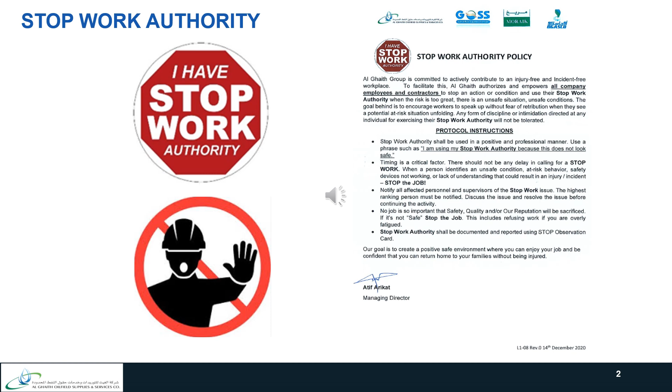Use a phrase such as "I am using my stop work authority because this does not look safe." Stop work authority shall be documented and reported using Al Ghaith and client stop observation card. Here are some scenarios where stop work authority and intervention was exercised at workshop, vehicle and at rig site.

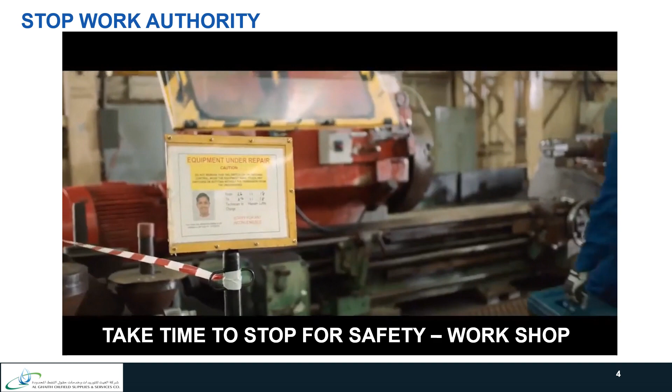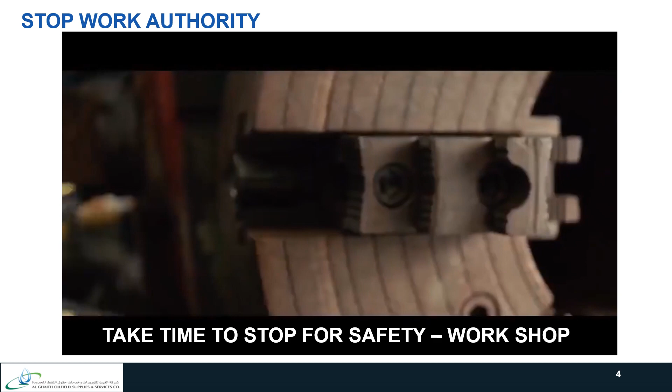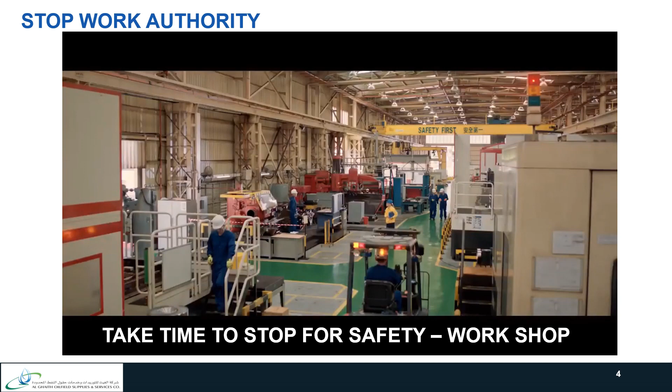Zam! Fadil. You should use the trolley instead. Come, let me help you. Don't forget to lock out, tag out.

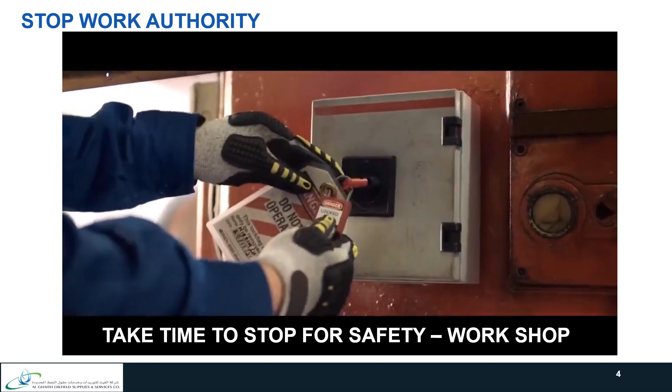Take time to take care of your safety and health at work and get home safely to your loved ones.

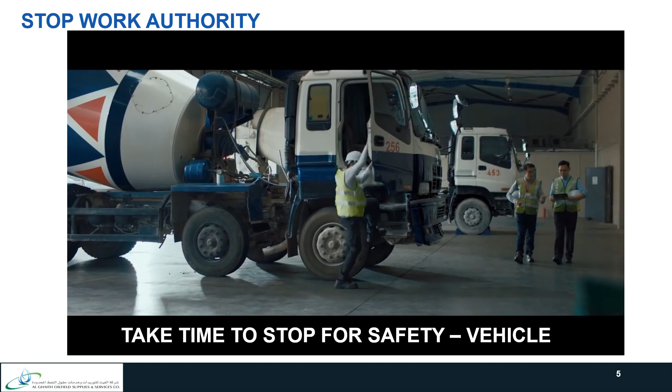Hey bro. Victor! Harness! Let's take a break. You forgot to put on the wheel chock.

Take time to take care of your safety and health at work and get home safely to your loved ones.

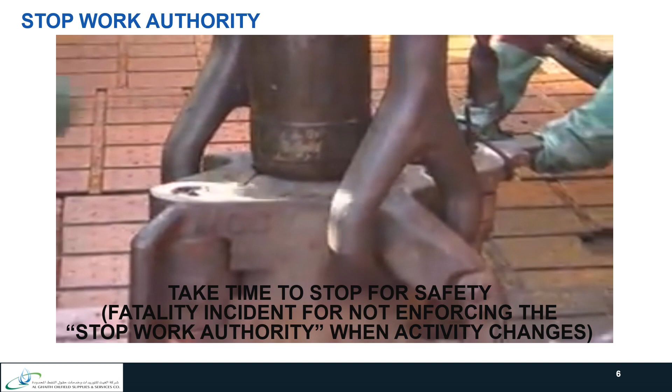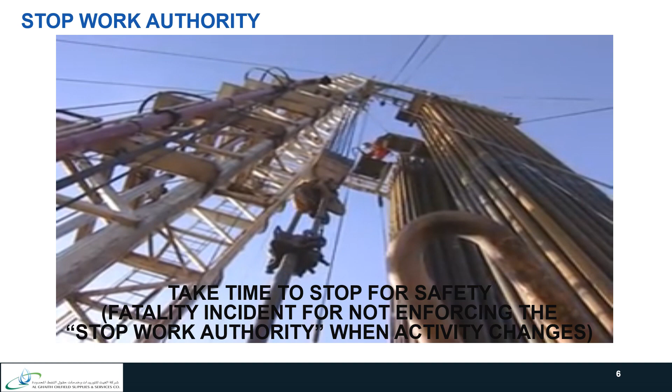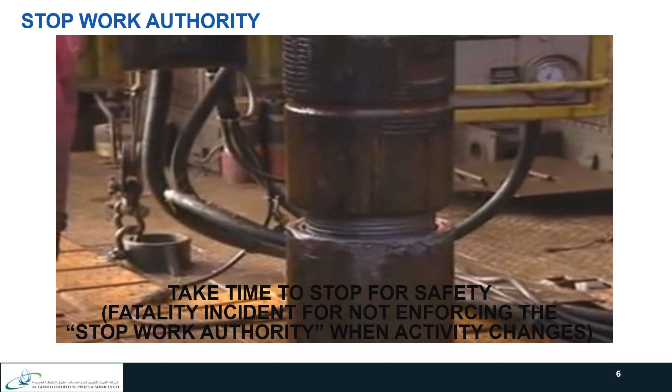But one small change in their equipment was about to have a catastrophic effect. The pipe string they were running was a cement stand, which with a cement stub added was 2 meters longer than their usual pipes. This meant they had to change the way they worked. The normal procedure was for the driller to lift the pipe stand out, and when it was disconnected, the two racking operators moved the pipe stand away from the rotary table, keeping it vertical.

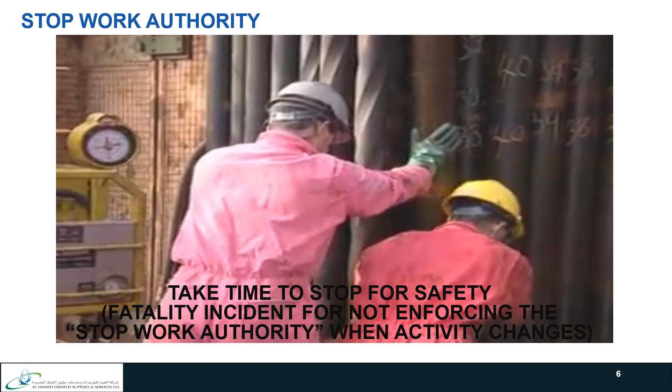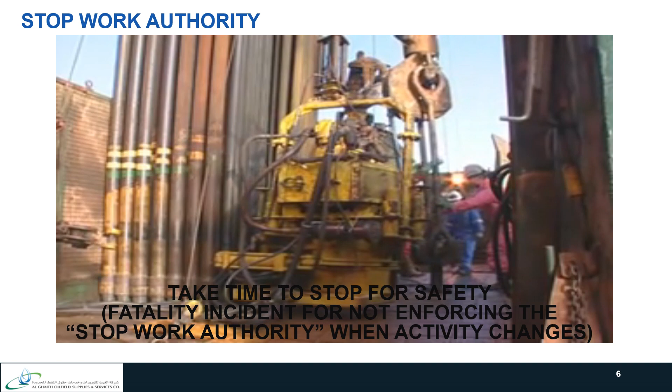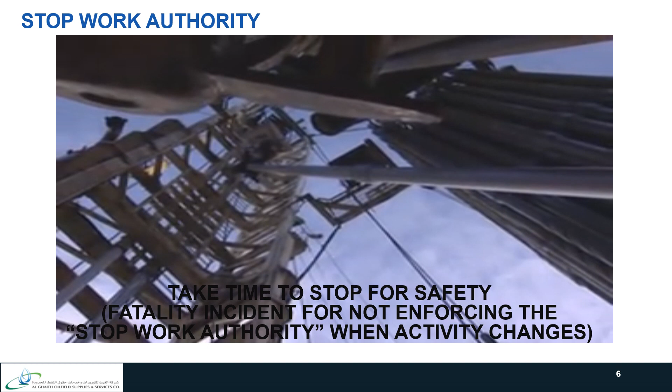Then the driller lowered the travelling block, which weighs about 60 tons, ready to connect up to the next pipe stand. But the longer pipe stand with the cement stub created a difficulty for the racking operators. It had to be inclined to put it in the rack. This took longer than normal, and for a short time the top of the inclined stand moved back into the path of the travelling block.

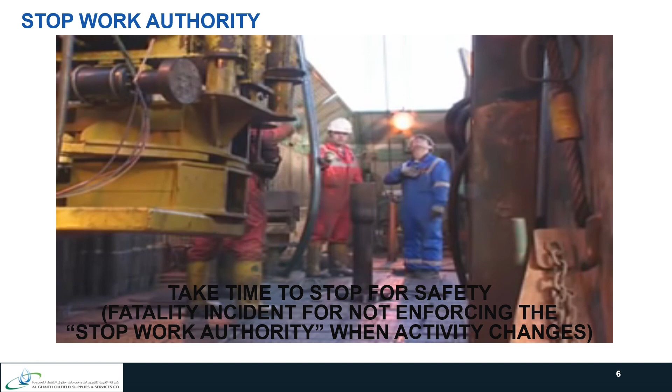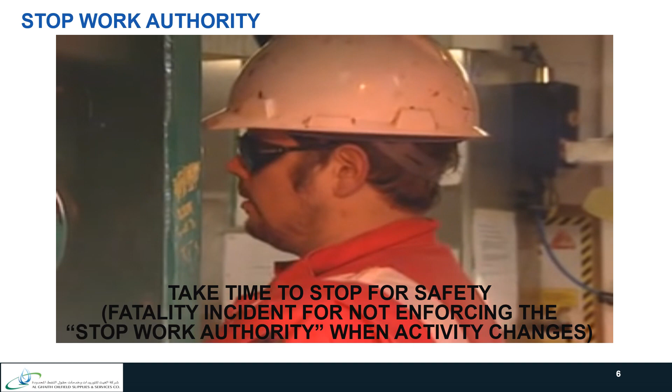At this point, 3 other factors were added to the fatal equation. The driller couldn't clearly see the top of the pipe stand more than 30 meters above him, or his colleagues on the drill floor. And he couldn't talk to them either, because his intercom had an intermittent fault. As normal, he started to lower the travelling block, believing that the pipe was clear. It was too soon. The inclined pipe stand was not out of the way.

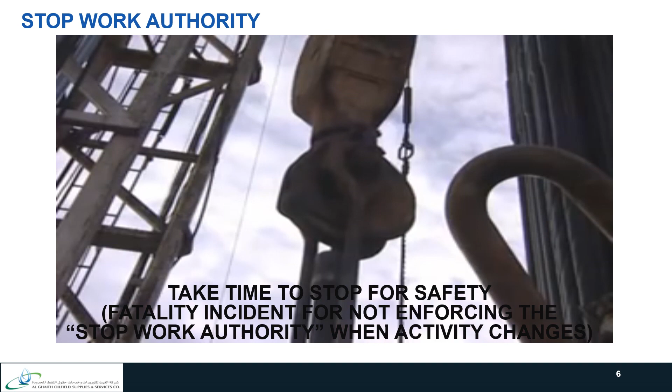The travelling block struck the top end of the pipe. The bottom end was driven into the drill floor, where it was momentarily caught. The travelling block continued to descend, its massive weight bending the pipe stand as it did so, and storing energy in the pipe like a coiled spring. As the bend increased, the bottom end suddenly freed itself from the coaming, and the pipe stand whipped violently across the drill floor, the bottom end striking Aydin and Suleiman. They both died instantly from the impact.

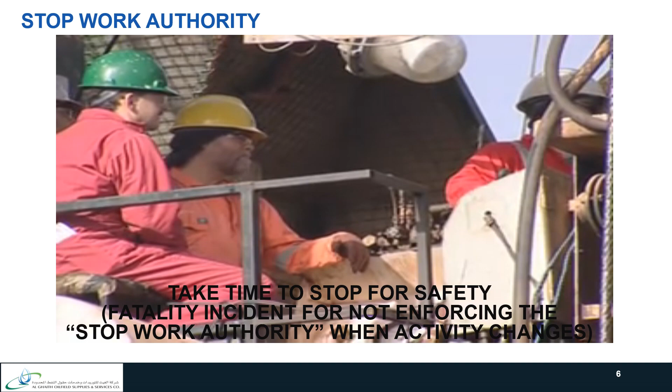The additional hazards of racking a longer than normal stand of pipe was a change that hadn't been recognized or formally addressed. Also, their work plan hadn't allowed for the faulty comms system.

Stop work means stop. When you or a colleague identify a situation or a behavior that poses danger to a person, equipment, or the environment, you must immediately initiate the stop work intervention with the potential person at risk. Intervene in a respectful way, includes active listening, focuses on what could go wrong and rectifying the issue.

Because of diverse culture and language barrier, sometimes delivery may sound different. You know what, people normally don't speak up if they are not 100% sure that they are right or what they are going to say will be well received. But mind you, those are the people who normally get hurt on the job.

Notify. Notify affected personnel and supervision of the stop work action. Investigate. Affected persons will discuss the situation and come to an agreement on the stop work action. Correct. Affected areas will then be inspected by supervisors on site to verify that all safety issues have been properly

resolved. Resume. All affected workers will be notified of what corrective actions were implemented and the affected areas will be reopened for work by the persons who have the authority to do so. Follow up. The supervisor or HSE manager will publish the incident details regarding the stop work.

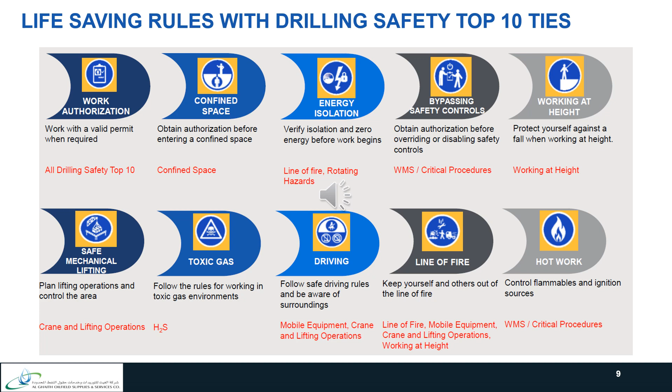6. Safe mechanical lifting, plan lifting operations and control the area. 7. Toxic gas, follow the rules for working in toxic gas environments. 8. Driving, follow safe driving rules and be aware of surroundings. 9. Line of fire, keep yourself and others out of the line of fire. 10. Hot work, control flammables and ignition sources.

Life-saving rule focus areas. 1. Line of fire. Line of fire is having a person's body or part of the body in the path of an object, equipment component, electrical energy or pressure that can cause harm or injury. 3 major categories of line of fire incidents are caught between, struck by, and released energy, electrical or pressure. Always implement the hierarchy of controls at work: eliminate, substitute, engineer out, administrative controls, or PPE. Implementing our safety values, combined with awareness of the fact that line of fire is a life-saving rule, is an effective way to prevent hurts.

2. Toxic gas. Hydrogen sulfide, H2S, gas is the most common toxic gas in Upper Zakum operations. It is also often present in drilling-specific operations. H2S is one of the leading causes of workplace gas inhalation deaths. Knowing common places present, mud pits, shallow water flows, production process facilities, is critical to having heightened awareness. Understanding and being aware of early warning signs, rotten egg smell, can help in early response and save lives. It is critical to know how to respond to possible toxic gas: move upwind, don breathing apparatus.

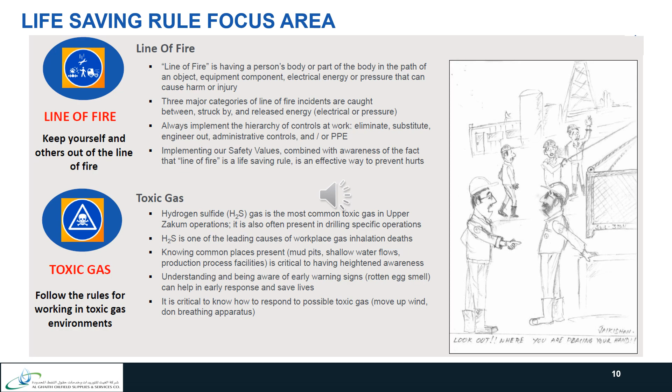Operational focus areas. 1. Do our jobs the right way. Own the mindset that safety starts with me. Speed or stretching yourself is not a measure of your value. Working safely is. Ensure effective communication focusing on verifying understanding, practice safety communication principles. Take the time to ensure procedural compliance by fully completing all PTWs and JSAs prior to executing critical tasks.

2. Empower team to be safe leaders. Encourage all crew members to be safety leaders, ensure everyone is heard. Drive the desired culture by intervening in a positive manner and responding to mistakes with a learning attitude. Objective is to prevent reoccurrence. Take accountability in identifying and mitigating unsafe conditions.

3. Identify high potential events. Look for the hidden dangers beyond your immediate work location, i.e., potential drops, loose grating, missing guards, lifts, high pressure, etc. Maintain situational awareness of dynamic overlapping red zones. Focus in on the application of human performance principles and life-saving rules to support in avoiding life-altering events.

4. What good looks like. Cultivate a culture of leadership and accountability by actively caring. Stay vigilant and revisit learnings often. Focus on avoiding complacency using everyone's approach to safety. Apply bowtie principles to operations. Discussions are effective. Document when needed.

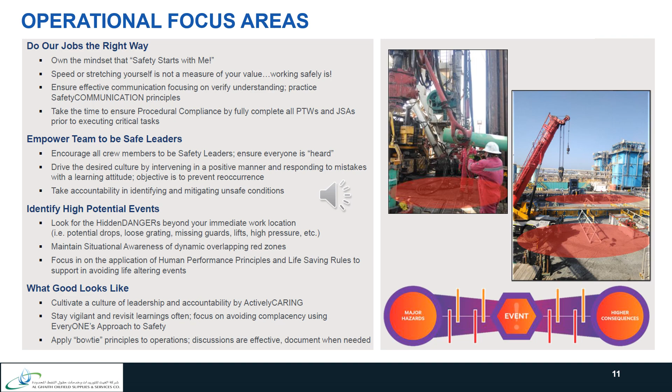All types of injuries including hand and finger injuries are preventable. Do you know that 35% of incidents in the last 5 years have affected hands and fingers? 4,514 hand injuries in the last 5 years. 75 per month. 19 every week. 3 every day. This could be you if we don't think of ourselves and others' safety.

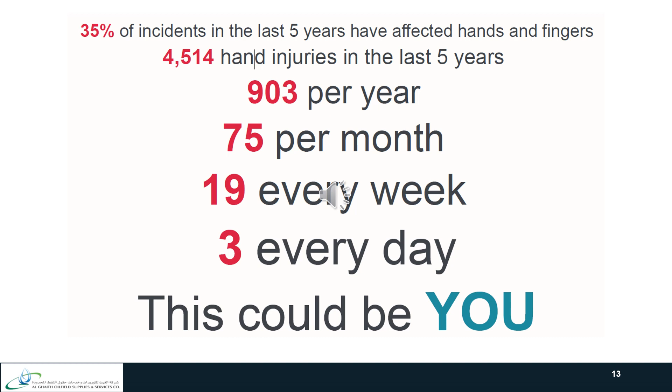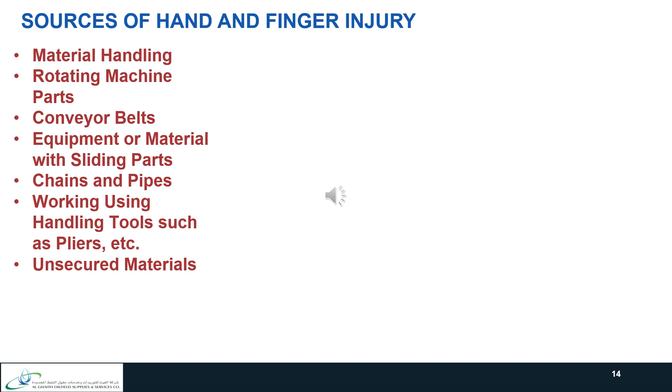Sources of hand and finger injury are present everywhere, even at home, especially in our workplace. Some sources of hand and finger injury in the workplace are during material handling, rotating machine parts, conveyor belts, equipment or material with sliding parts, chains, and pipes, working using handling tools such as pliers, etc., unsecured materials, and many more.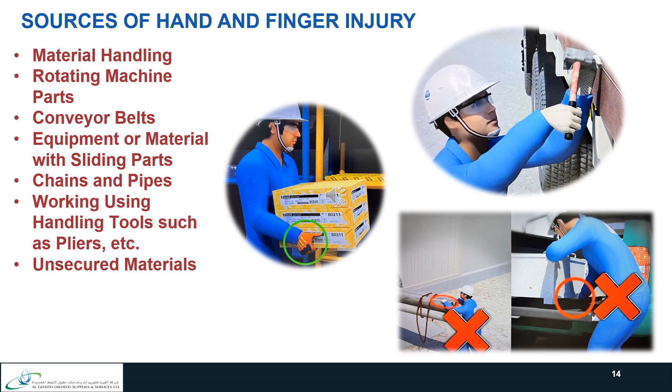Al Ghaith has adopted a system of color coding of equipment to have adequate visibility on right placement of hands so as to prevent hand and finger injuries. 1. Yellow, black striping red, identifies pinch, crush points for power tong. 2. Red, identifies pinch, crush points for all handling tools and other tubular running equipment.

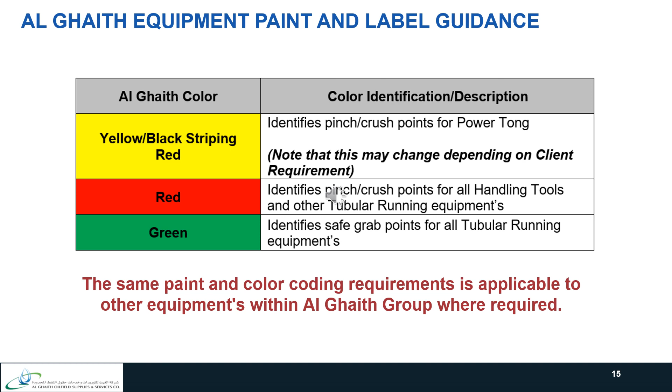3. Green, identifies safe grab points for all tubular running equipment. Note that the same paint and color coding requirements are applicable to other equipment within Al Ghaith group where required. Now, let's look at major equipment used in our operation where paint and label was used to promote safety and prevent and/or mitigate pinch point, hand and finger injury.

Here are examples of paint color coding applied for different types of power tongs. Yellow, black striping red, identifies pinch, crush points. Red, identifies pinch, crush points. Green, identifies safe grab points.

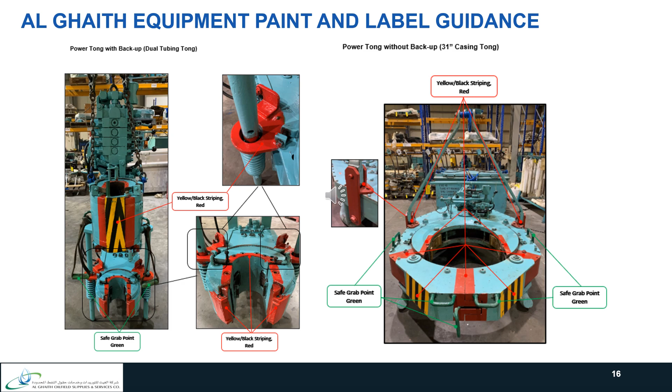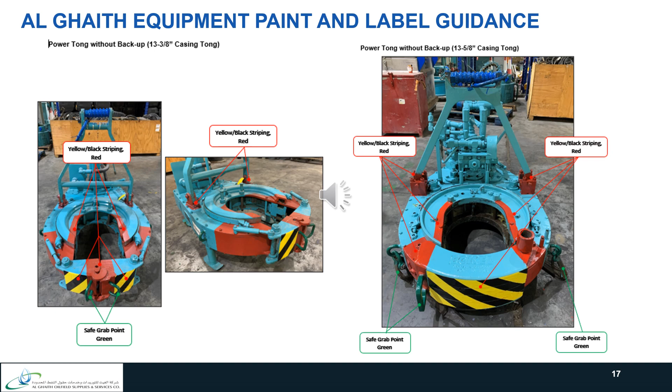Paint color coding applied for other types of power tongs. Yellow, black striping red, identifies pinch, crush points. Red, identifies pinch, crush points. Green, identifies safe grab points. Paint color coding applied for belt tong, elevator and safety clamp. Red, identifies pinch, crush points.

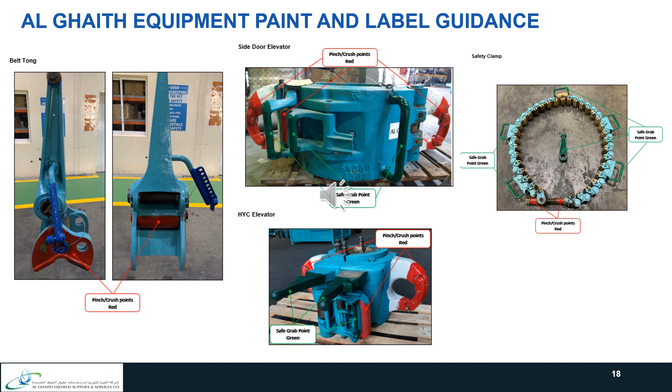General hazards to be aware of when handling/moving equipment. Think head before hands. Recognize pinch points. Be mindful when closing doors. Use proper PPE, beware of rotating equipment.

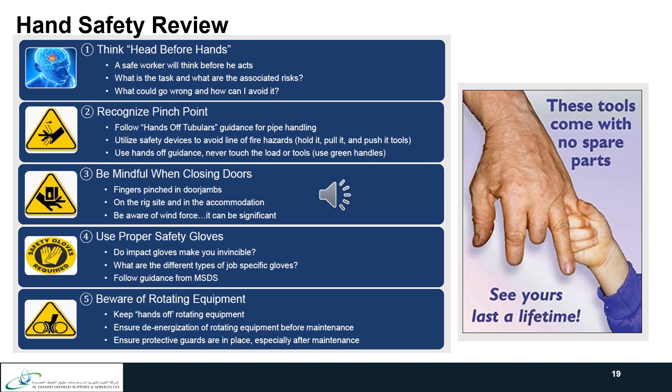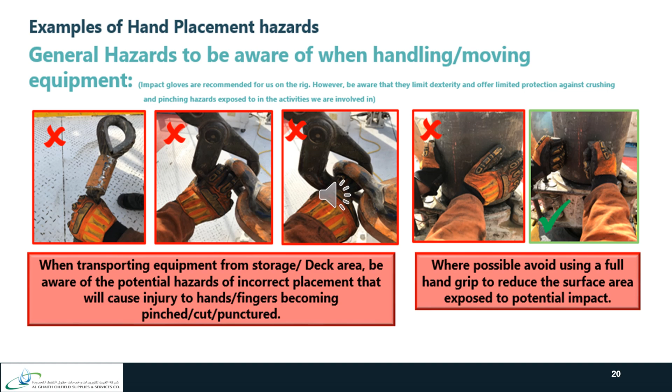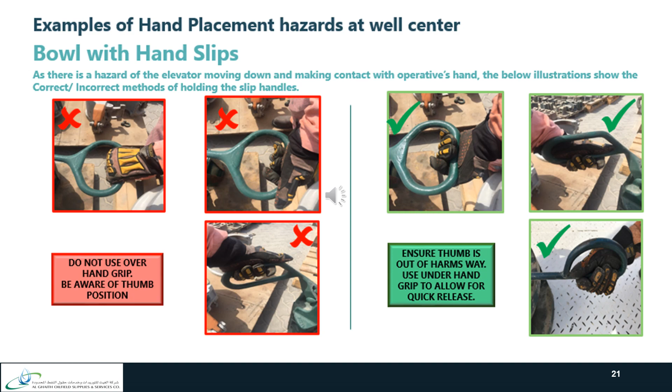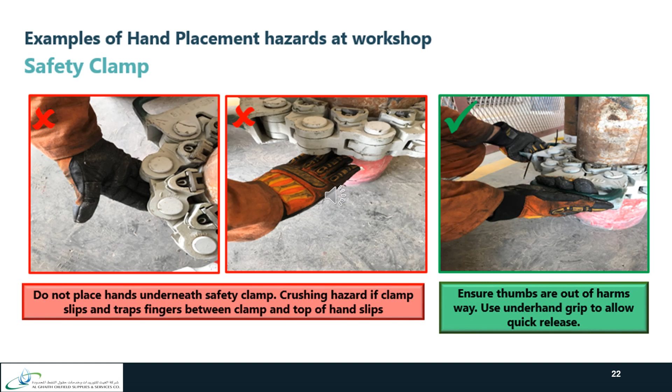Wrong, unsafe and right or safe hand placement for safety clamp. Do not place hands underneath safety clamp. Crushing hazard if clamp slips and traps fingers between clamp and top of hand slips. Ensure thumb is out of harm's way. Use underhand grip to allow for quick release. Wrong, unsafe and right, safe hand placement for elevator. Perform pinch point survey and place your hand on green safe grab point only.

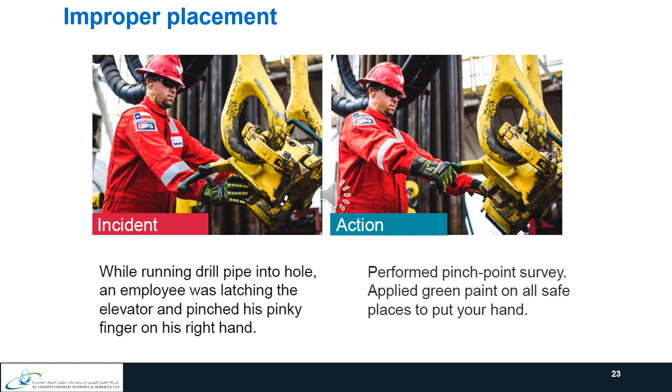Improper placing of hands during running operation at rig site. Potential crush, pinch incident may occur.

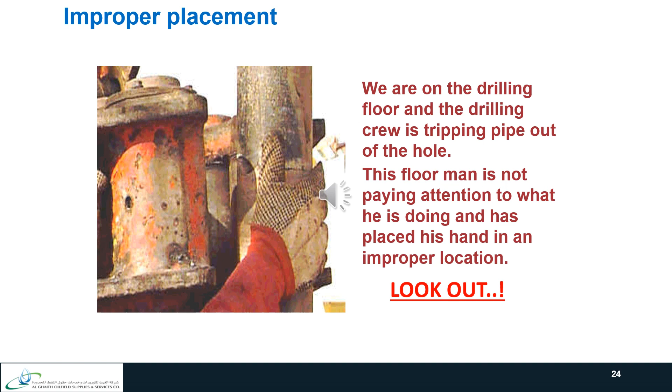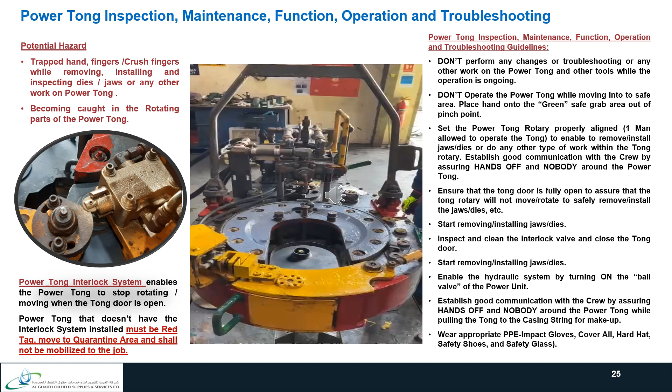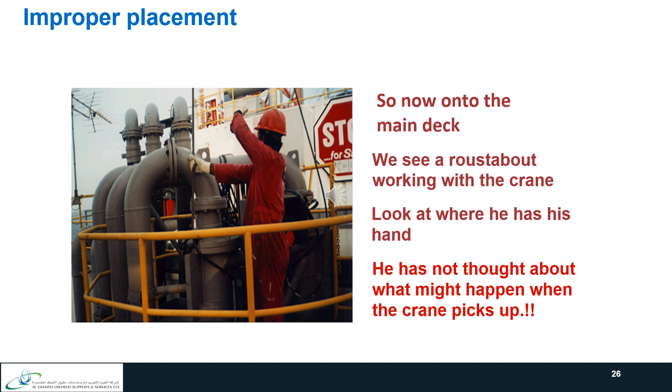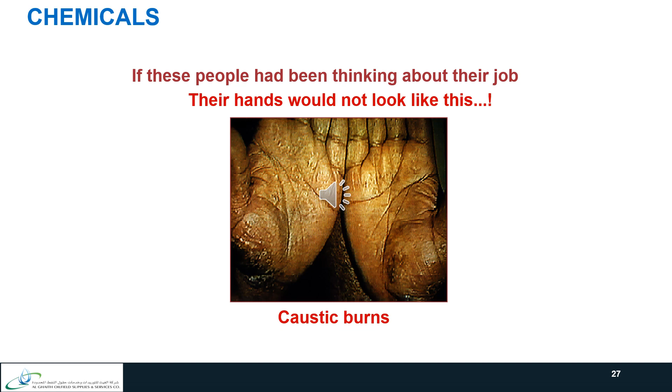Example of wrong, unsafe hand placement of roustabout working with the crane holding the sling. If we had been thinking about our safety, these hands would not be burned. Please consult the safety data sheet before handling any type of chemicals to ensure proper PPE is provided to prevent any hand injury from handling chemicals. Once an incident occurred, our life will never be the same again. Simple buttoning a shirt will not be as easy as before.

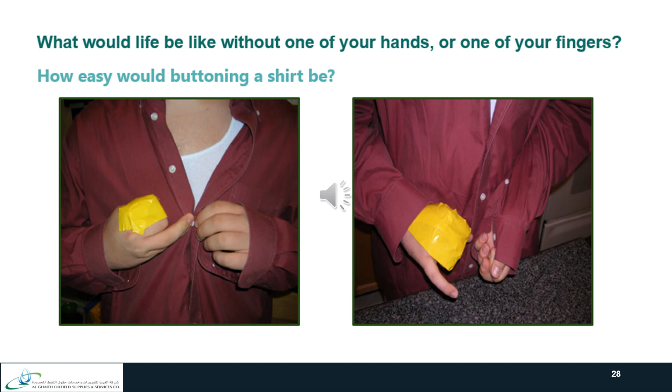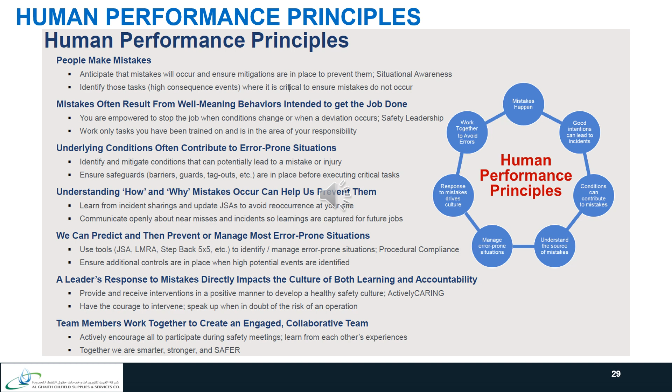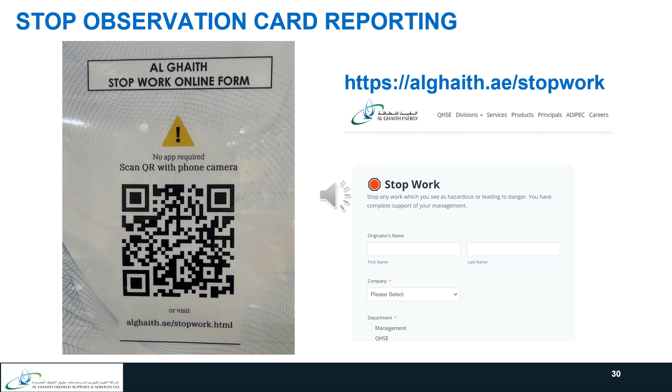Note that the Stop Observation Card Reporting System is also applicable to provide positive observation or to commend a safe act or condition. Once the observation card is generated, this shall be shared with relevant personnel during the Toolbox Talk for lessons learned purpose. Remember, you are empowered to stop the job when the condition changes or when a deviation occurs. Have the courage to intervene in a positive manner. Together, we are smarter, stronger and safer.